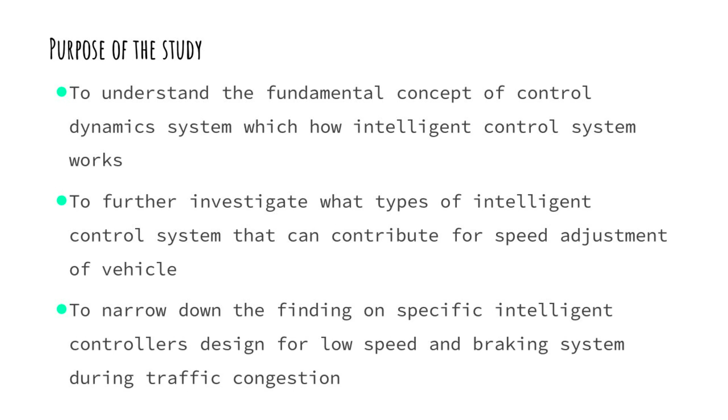So what is the purpose of my studies? First, to understand the fundamental concept of control dynamic systems, how intelligent control systems work. Second, to further investigate what type of intelligent control system can contribute to speed adjustment of vehicles.

As we know, cruise control systems cannot be adjusted to low speed, such as 50 km per hour. So we want to reduce it to maybe 30 km per hour and below. Third, to narrow down the findings on a specific intelligent controller designed for the low speed and braking system during traffic congestion.

For the problem statement: first, traffic congestion is a normal scenario in Malaysia, especially during peak hours and in busy cities such as Kuala Lumpur. Every day we can see in KL the road is always jammed, especially at 8 AM in the morning and also 6 PM, because people are rushing to go to work and rushing to go back home.

Next, being in traffic can affect the body's wellness over a long period when keeping pressing the manual accelerate pedal and brake. If we take a long duration in our own vehicle, we feel really tired and also stressed, as the road is jammed, taking 1 to 2 hours to arrive home.

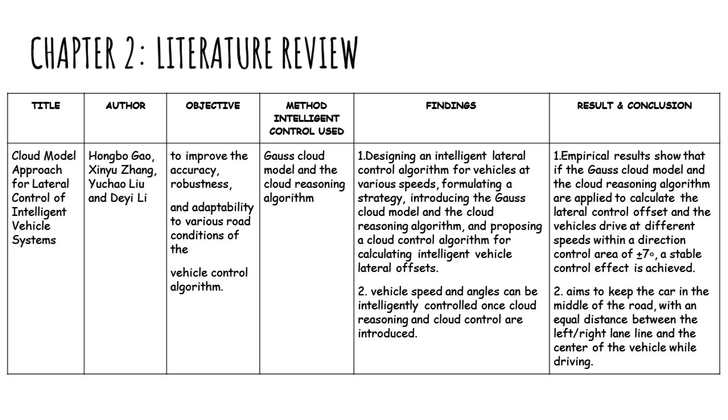They designed their methods using the Gauss cloud model and cloud reasoning algorithm for calculating the intelligent vehicle's lateral offsets. They also wanted to find that vehicle speed and angle can be intelligently controlled once cloud reasoning and cloud control are introduced. For the result, the vehicle drives at different speeds within a direction control area of plus or minus 7 degrees only, with the aim of keeping the car not too far left or right, so the car stays safe in the lane.

The next article we found is intelligent control and simulation of automobile cruise systems based on fuzzy logic. The objective is to improve active safety for the driver and alleviate driving fatigue. An intelligent control strategy for automobile cruise is put forward based on throttle or braking pedal combined control adopting fuzzy control theory. The fuzzy control uses two variables: the deviation between theoretical safe distance and relative distance, and the relative velocity between the preceding vehicle and the cruise vehicle.

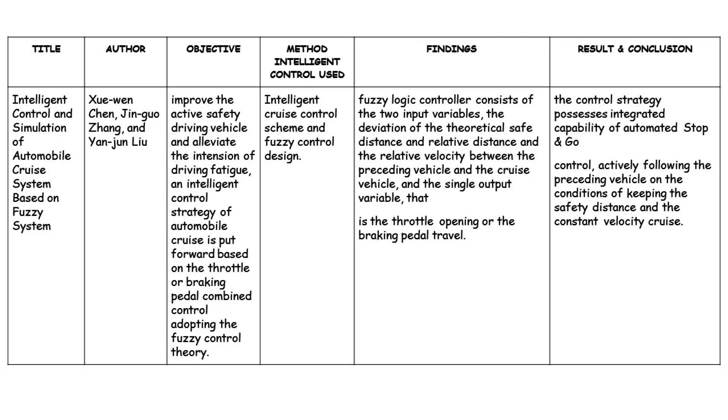So the result is the control strategy possesses integrated capability for automated stop-and-go control, actively following the preceding vehicle while keeping the safety distance and constant velocity cruise.

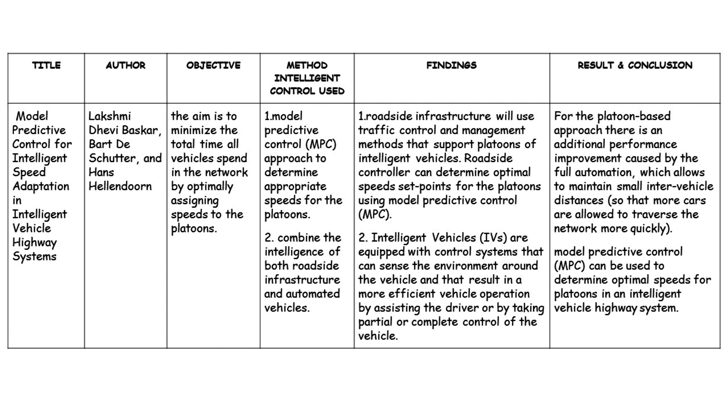The third article is model predictive control for intelligent speed adaptation in intelligent vehicle highway systems. Here they use model predictive control combined with the intelligence of roadside infrastructure and automation, aiming to minimize the total time all vehicles spend in the network by optimally assigning speed to the platoons. The result shows model predictive control (MPC) can be used in determining optimal speed patterns in the intelligent vehicle highway system.

Next, we found an article about an intelligent control system for braking. They designed an automatic car braking system using fuzzy logic, where the fuzzy logic controller was designed with an ultrasonic sensor. The results obtained by the simulation model, compared with the existing system, show the proposed model conveys satisfactory results with high consumer acceptance.